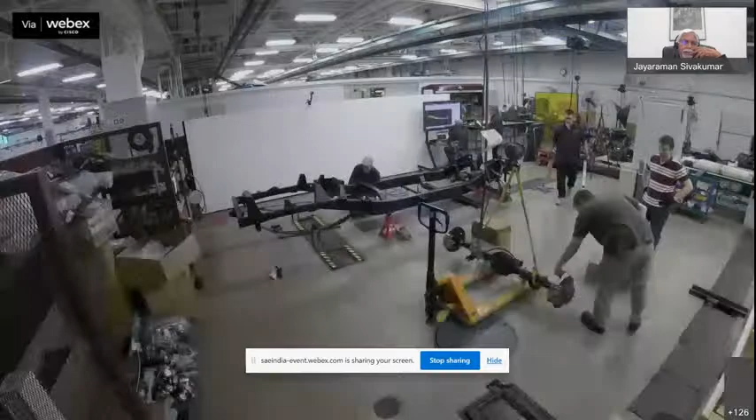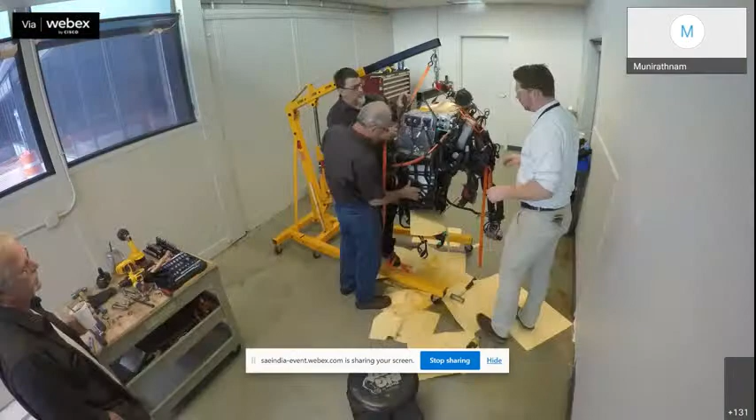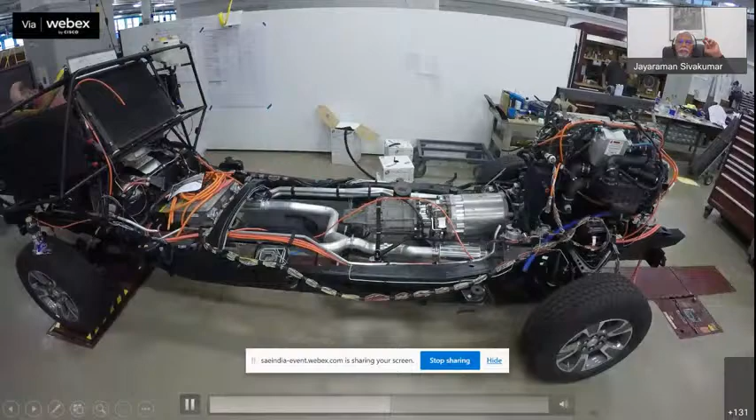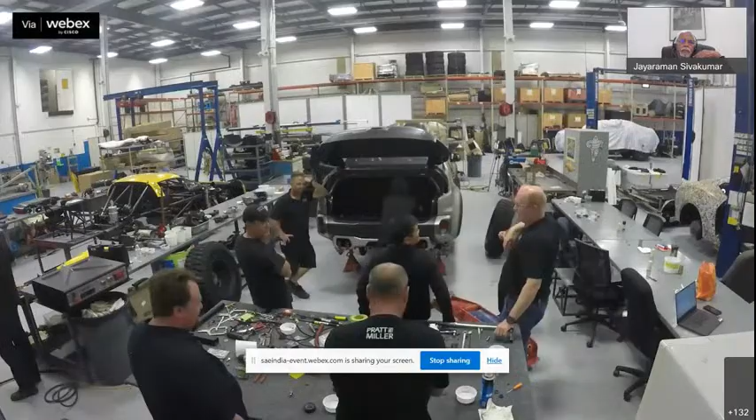Can you see my screen? Yes, sir, I can see your screen. Is it blue? Jeez, I have a problem with my laptop. I got to stop. No, I think that was basically checking. Can you hear the music? No, we are not. How do I get the music on? If audio and video, can you hear and be able to. So you can go to audio and video there, sir, on the top, just next to view on the top menu of WebEx. On the top, so file, edit, view. Okay, hold on. You can't teach an old dog new tricks. So in that WebEx, on the top, you can see audio and video. Able to see that? Now we can, where do I? Fifth tab from the left. Slightly above that, above file, edit, share, view, audio, video. In the WebEx screen, Shiva. So you can unshare, sir. Can I request you unshare your screen and go to the top. Unshare, on the top you see file, edit, share, view, audio and video on the top. I don't see that. Okay. I stopped. You can see my screen, right? I'm not sharing. So yeah, on the top side, file, edit, share, view, audio, video. You're not able to see on the top? I don't see. Okay, looks like my ignorance is exhibited a lot. So we'll stop at that point. So we'll play without the music and assume some nice drums behind in the background. Some audio is coming. Yeah, finish this.

So you were able to see our fuel cell being assembled without the music, I guess. This is a very old video clip, probably 5 years old. The only reason I brought this up, I think Venki talked about collaboration, and you saw how the whole thing was collaborated and built in probably 2 minutes on the video. I want students to look at it and work in the same fashion, seamlessly, without any issues or bickering, working together as a team. So these fuel cells, we are doing it for buses and also for military vehicles, it's being worked out. Basically they could enable stealth in army vehicles so that they cannot be detected by radar or sonar. It produces close to 2 gallons of water per hour, so in a desert it is much easier, you get water for free. The range is around 300 to 400 miles without recharging, and if left alone it can power a hospital in the middle of nowhere. So this is part of our future for taking care of energy issues, and having a zero emission policy.

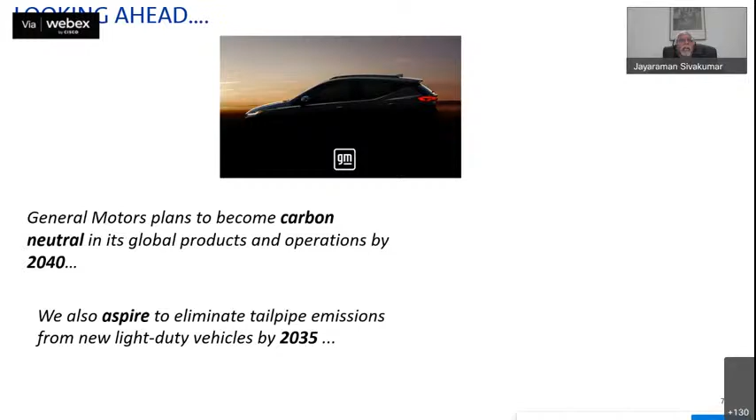Looking ahead, General Motors plans to become carbon neutral in its global products and operations by 2040. When we say carbon neutral, what we mean is the output of carbon dioxide is made neutral. You are not adding anything to the system that would mess up global warming or climate change.

We also aspire to eliminate tailpipe emissions from our light duty vehicles by 2035. And you saw our fuel cell in operation. We are doing it for Navistar, for the Class 8 heavy duty trucks, and we had some in buses in Seattle, if I remember right. There is a fleet of fuel cells running all over the US with hydrogen fuel stations. So this is all our commitment for the future, being very energy efficient.

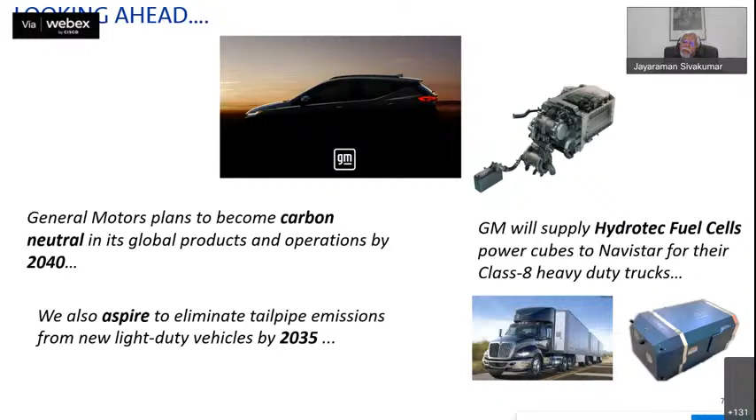So we've got many exciting electric products and concepts, and Ultium is our basic platform that we use. It's very revolutionary, a very flexible battery architecture. It will take different vehicle types, and it produces outstanding power, range, and performance.

So you could go anywhere from 6 to 24 modules. These can be placed vertically—we call that the 'toast'—or horizontally, called the 'pancake' version. Based on the number of modules, you have the type of vehicle we use, and it provides a very thrilling driving experience. It allows us to be charged, and it offers the range which we want to hit the road with confidence.

And also this Ultium architecture being at the bottom provides almost nearly 50-50 weight distribution of the vehicle, and it lowers the center of gravity, which results in a vehicle that is much sportier, more responsive, and allows for very spirited driving.

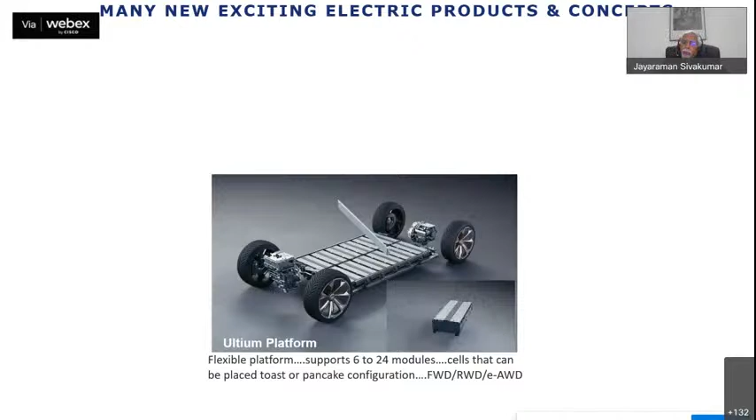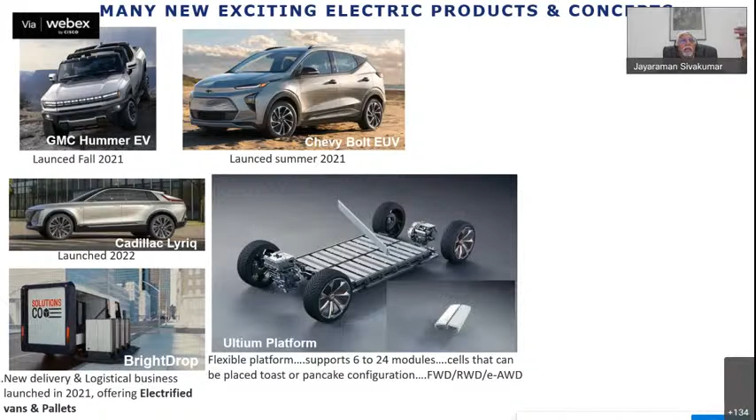And on the bottom you see BrightDrop. Basically, it's a delivery truck. It has pallets which are done electrically, no more manual stuff. It's a lot safer, and you can get your stuff in and out, and delivery is made much easier. This vehicle was launched in '21, last year, and the development time for that was less than 2 years—total development was around 1.5, I am told. There was a lot of virtual activity that went into it, and I will talk about that shortly.

And on the right side, you see Cruise Origin. It's planned for release in 2022. It's an autonomous vehicle, self-driven, all electric, and it is a shared vehicle. It's being tried in San Francisco, and they're going to try it in Dubai this summer. Once the concept is tested, it will be out on the roads pretty soon in major cities in the US.

And on top, you see the cell manufacturing facility in Lordstown, Ohio. It's a joint venture with LG. It has a capacity of 30 gigawatt hours per year. Originally, they were producing trucks in 2017, 2018, and now this is providing jobs and manufacturing a lot of batteries for our future products.

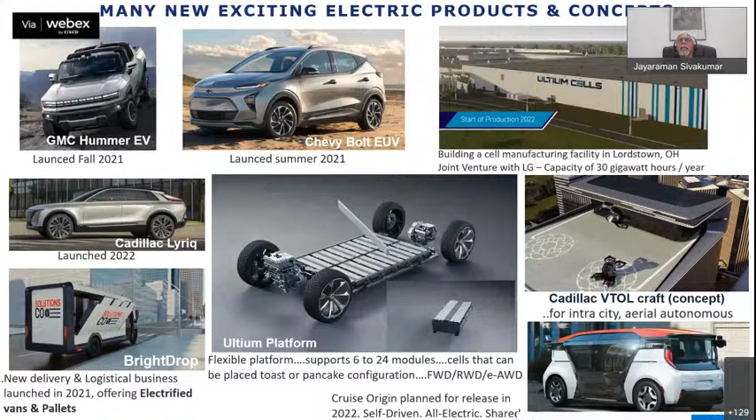And what you see in the last one is the Cadillac VTOL. It's a concept drone craft for intracity autonomous travel. Like a helipad, you come on top, get down, and it's totally self-driven. I think this will be a must for Bangalore, going from the airport. We have helicopter rides today, but very soon you'll see one of these hovering, based on how mobility folks push things forward.

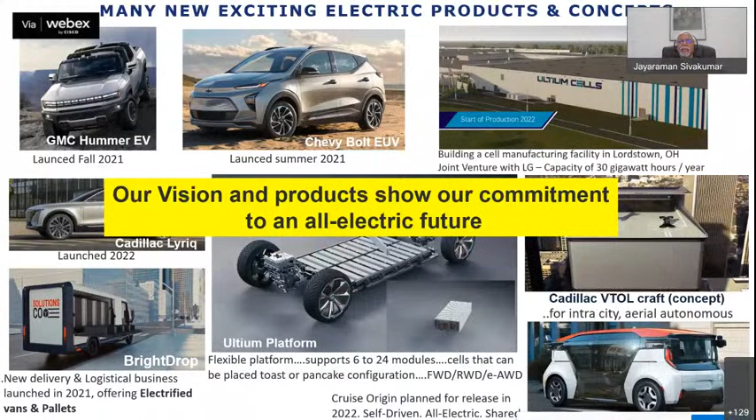So it's very clear our vision and products show our commitment to an all-electric future. You guys are part of this as students, researchers, and fellow industrial colleagues. This is where the world is headed to.

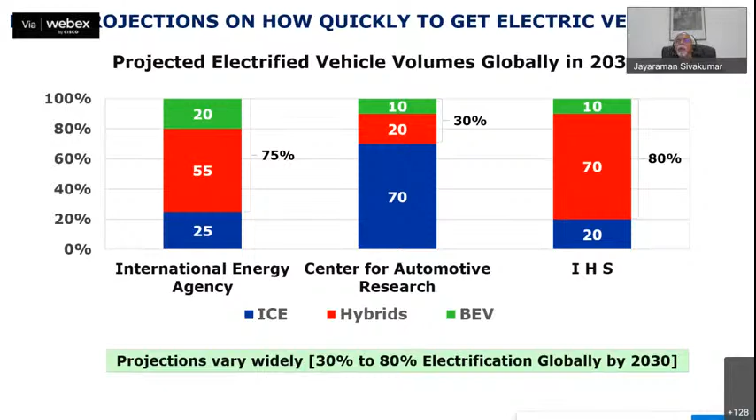If you look at this graph, I want to show projections of how quickly we get to electric vehicles. The International Energy Agency talks about 55% hybrids, 20% battery electric vehicles, whereas Center for Automotive Research claims 70% ICE and 10% BEV. IHS Markit, the S&P company, says 70% will be hybrids, 20% ICE, and 10% BEV. So there's a large variation in projections for electric vehicles by 2030, ranging from 30 to 80%. But if you poll executives, they're somewhere in the middle, averaging around 52% predicted by 2032 for new vehicles bought by customers.

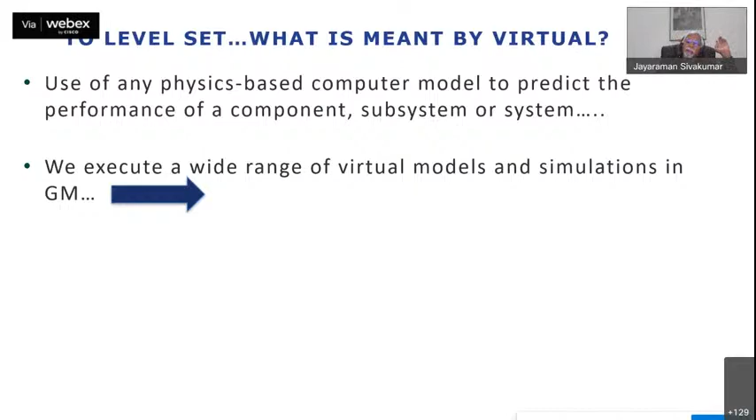Before we go, what is the rationale behind analysis? Where does analysis come into the picture to achieve this vision?

So if you have a new concept, you do the architectural level analysis first. At this point, you don't have high fidelity computers or software, you have very simple synthesis tools, and you look at the concepts. You have best practices, you use them, you have thumb rules, and you have experts' opinions. You do all that, and then you go to the CAD or get the design done.

Once you get the design done, you do rapid analysis, and the arrow you see in light or dark yellow, you go through several iterations of that. That is the best time to clean up your design virtually.

Once you are done, you come down for virtual validation using high fidelity models. This is a virtual dyno. Still, at this point, there is no test, no alpha vehicle, no beta vehicle. So you are still working on the computer and generating a virtual model.

So then you go ahead on a loop. You find something on virtual, you go back to the design, clean up the process. You iterate till you are comfortable that you meet all the requirements, and then you do one hardware validation, because we would like to see how the car drives, how the engine performs, how the system works. So you do a final hardware validation. After validation, if you have a problem, you understand it, go back to design, and go through this loop again.

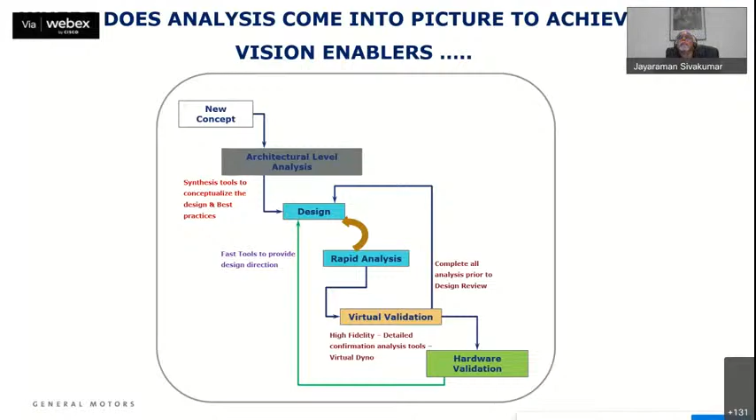So this is a structural simulation. On the left, you see stresses in a car body hitting a pothole. Hitting a pothole is very common in Michigan, the roads are not that great. Also in Bangalore, if you hit a curb, you'll know either you've screwed up your control arm or your tie bar, your alignment will be gone, your tire is gone. So all these load cases are done virtually, you don't need to try it on the roads. We make sure we cover the majority of these load cases. That is the stress pattern you see when you hit a pothole.

On the right side, you see deformation of a battery pack due to abuse jacking. Whenever you have a flat tire and want to change it, it happens at the inopportune time, so you pull your jack and put it on the specified locations you're supposed to use. But 90% of folks don't use those locations. That's why we do this abuse jacking analysis, to check if you do that, does it damage the enclosure of the battery pack and the bottom of the vehicle, does it screw up the battery pack?

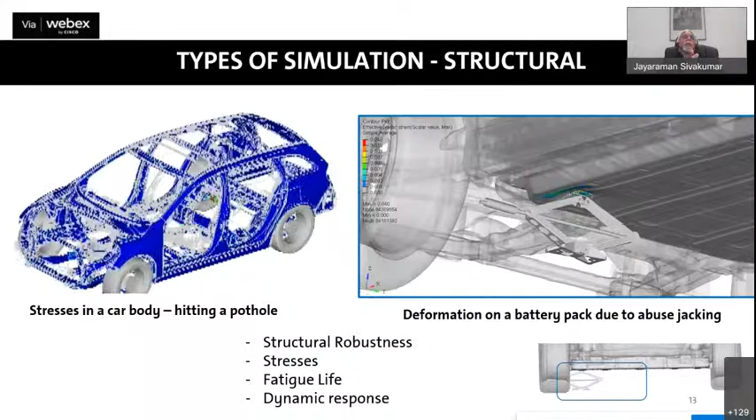A similar thing we do on ICE is on the oil pan. We also do abuse analysis there, if you run through chunks of ice in western countries in winter, do you get road load abuse and all that? So we look into all structural aspects, we look into fatigue life, dynamic response, frequencies, noise, and a good number of other things.

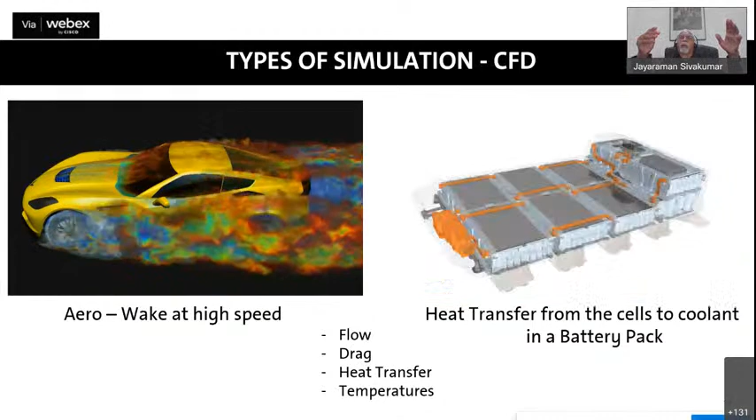On the right side, you see we run a coolant flow on the battery pack and make sure the battery pack does not heat up to the point where we have issues. I have a couple of slides later to talk about what happens when your battery packs get heated beyond what you can allow.

So through these analyses, we are able to predict flow, drag, heat transfer, temperatures, and stresses due to temperatures, and so on.

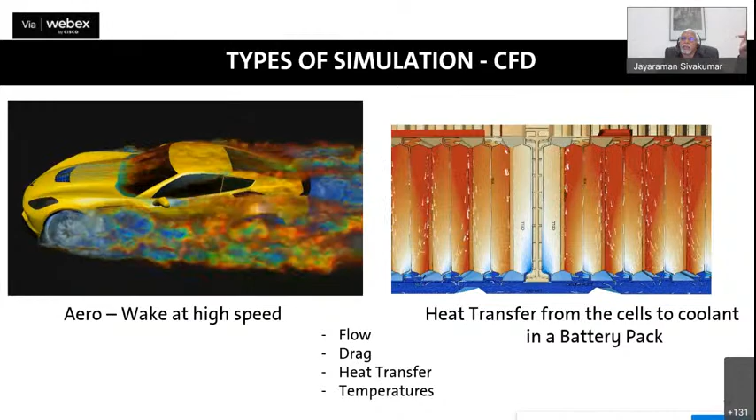GM is big on safety, and every car manufacturer is big on safety. There's a consortium where all of us work together on this. What you see here is not a test, it's actually an analysis with a nice animation. When there's a side impact and collision, you see what happens to the vehicle, and then the effect of deploying the airbag. Let me run it one more time.

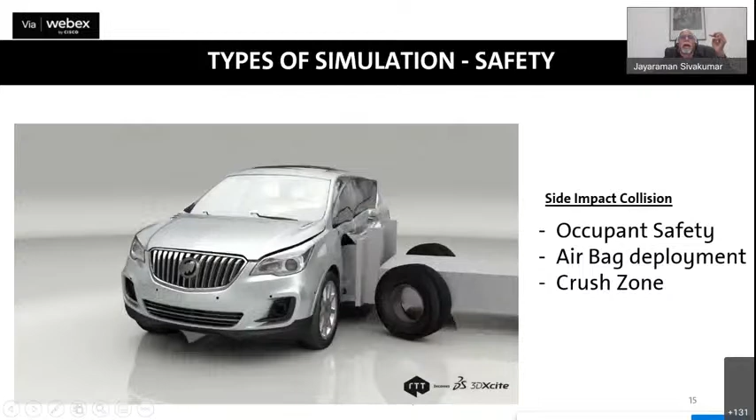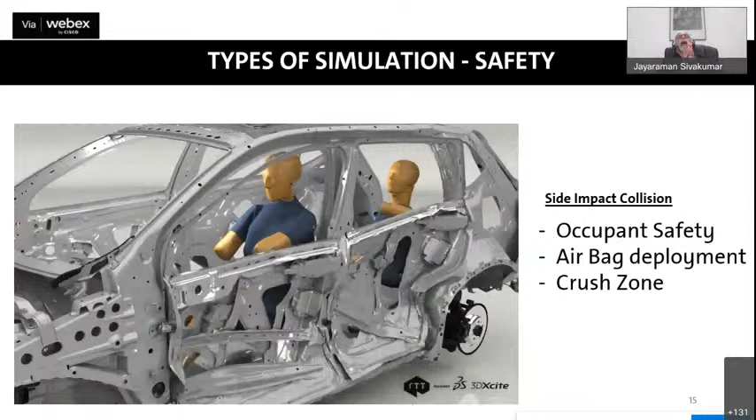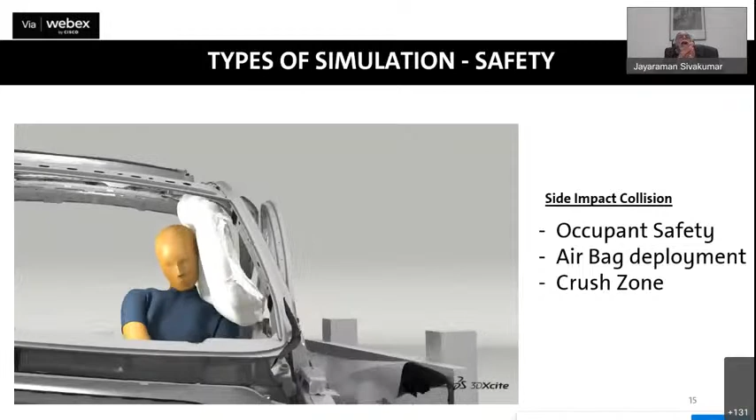These are dummies, instrumented analytically so we know the displacements, deformations, and all the important variables and parameters. We modify and even give suggestions to the airbag manufacturer on how to deploy the airbag, where to place them, and so on. We also define the crush zone and do the deployment analysis.

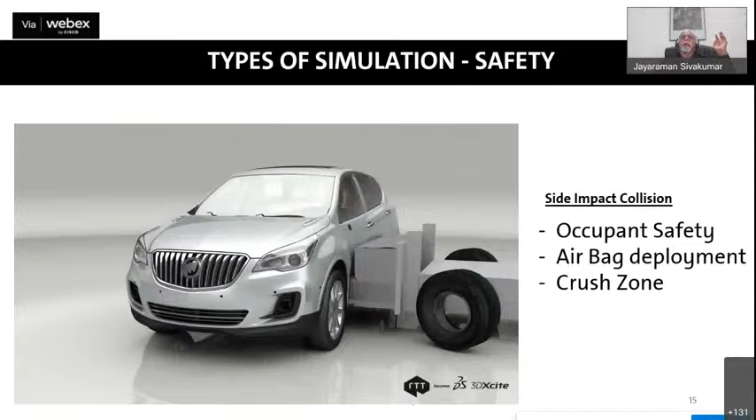The next topic is human body modeling. When two vehicles have an impact, vehicle to vehicle, on the left side you have a belted passenger, and on the right side an unbelted passenger. I want you to take a look at how the dummies move.

See, this dummy on the right is coming out of the chair, look at the neck and the amount of stress that comes out on the neck. These fractures are pretty serious and fatal in most cases. So this shows how important the use of a seat belt is.

We do all kinds of human body modeling, and GM belongs to a consortium where we share human body models. There's a 95th percentile, 5th percentile, different kinds. They model the joints, they model the muscles, and it's amazing. It's a science by itself.

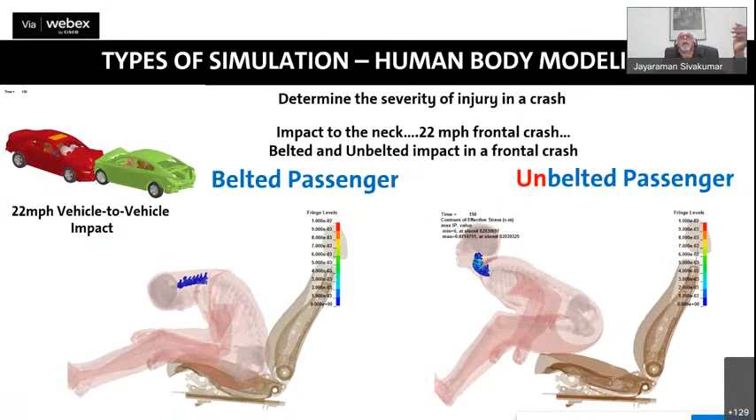So the message of this slide, and of this 20-minute conversation, is: if you are not buckling up, I want you to buckle up and tell your friends to buckle up. When you drive, do not start the car until your loved ones and friends are buckled, not just in front but in the rear also. Everyone needs to be buckled to be safe.

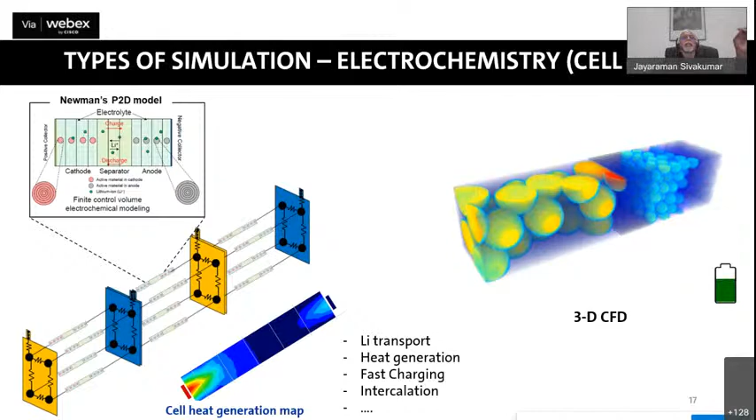We do a whole bunch of analysis, I won't go through all of them, just highlight some. We size the propulsion for the vehicle, optimize the shape of the cell, and do a lot of testing. Being new to us, a couple of our friends in Bangalore at the TCS facility test cells for us. We do lithium plating limits at the cell level, DC fast charging limits at the pack level, and fast charge analysis at the 3D CFD pack level, looking at both 1D and 3D concepts.

We also model thermal runaway propagation, a key design challenge. Once you have the enclosure, whether a pouch cell or cylindrical cell, take the pouch cell for example: these swell due to heat and put pressure on each other, like a sound wave. It swells up the enclosure, and if you don't vent it properly, it's just going to blast. Before this happens, the heat generation catches and gives fire, what we call a thermal incident, and it catches so fast that within milliseconds everything goes into fire.

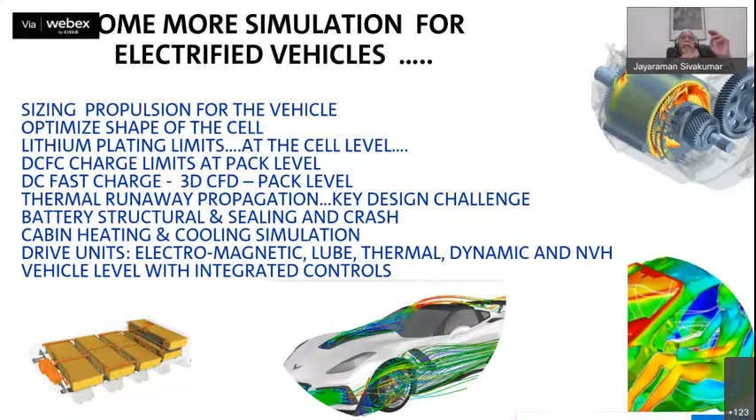And we also do vehicle level work with integrated controls, which is a big thing. So I want to show this schematic where we have system and subsystem models on the vehicle.

These are optimized models that include the drive cycles, the environment, the driver demand, the batteries and motors, all the transmission components, the cooling, the HVAC, and the cabin. Everything is modeled, and these are plant models.

We add virtual calibration and embedded controls. Instead of testing on the HIL bench, now we move to SIL, software in loop. From software in loop we go to driver in loop, then vehicle in loop. So everything you'd calibrate on the road, we can calibrate in software much before the hardware is built—that's the power of the virtual approach.

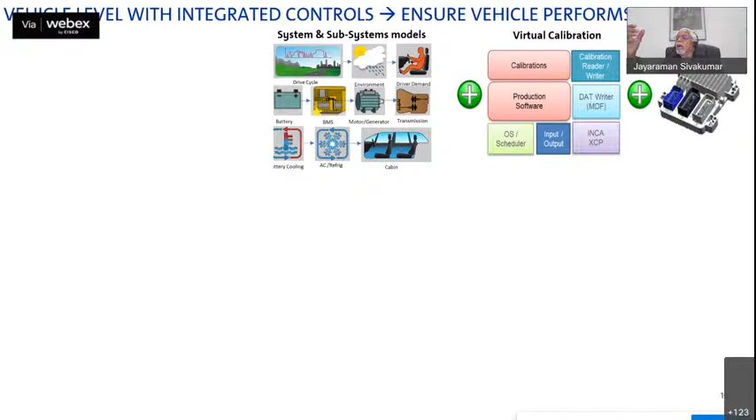This is where the controls engineers and mechanical engineers work together, with a software component to it. We're moving into software defined vehicles, with a lot of infotainment aspects, and all of this is combined together, working upfront.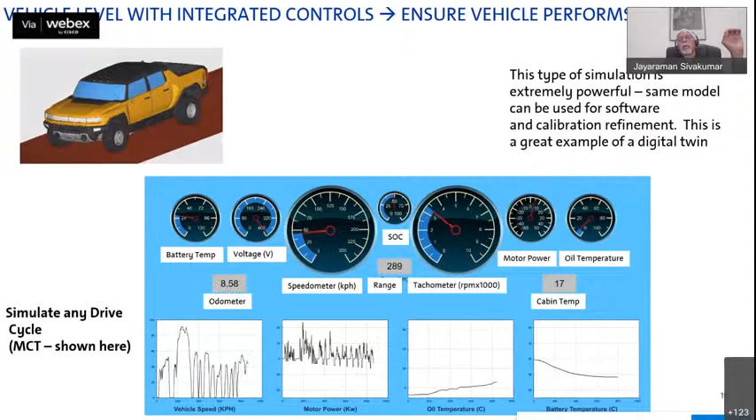So everything is done virtually, and once you're satisfied, it goes into the hardware. This is why we call it a great example of a digital twin, a virtual model.

If you look at ICE engines and electric vehicles, the simulation tools Venn diagram shows the vehicle level. Most of them use common software where we do structural crash, ride and handling, the human body, the SiL, the NVH, the 12 volt which takes care of lighting and other activities in the car. So these are pretty much common.

But in ICE, we have combustion, after-treatment, and fuel injection—these are specialized software. On the EV side we have the same thing: electrochemistry, electromagnetics, high voltage. There's a huge group of power electronics people who are the core of the analysis making this happen.

So all these guys have the right software. We work with suppliers; we cannot do it alone. This is done with suppliers and software partners, and it's an evolving industry on the virtual side. These are more unique, and each OEM has their own style of doing it. We are committed to doing 100% virtual work and only testing in the final version.

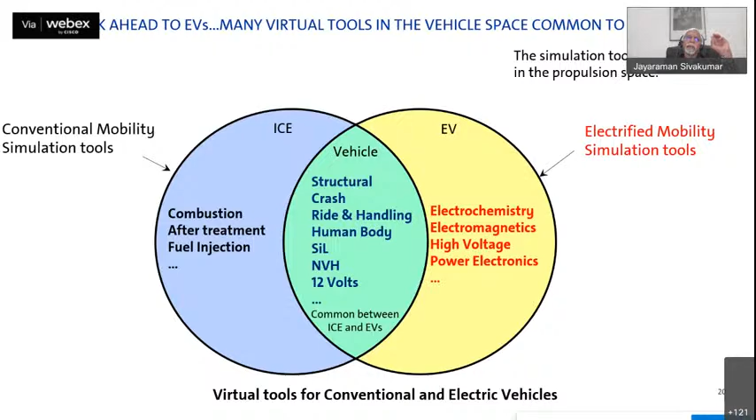So when I say we have challenges, what we have decided is we are going to cut our development time into half, and we are also going to reduce the hardware completely, to the point wherein we will not spend any for protos. That gives us the challenge to do all this virtually, and we have a lot of challenges.

Early on we have the VTS, the technical specifications. We have the range defined, we have the 0 to 60 defined, we have the top speed defined, and then we synthesize using models. We know what battery capacity you need, and once you decide that, you go to the motor design, how much torque it has to transmit, then look at gear ratios, and work on power electronics. All this is done on vehicle level system models, and I don't even claim to know how these folks do it. It's phenomenal that they put all this together upfront.

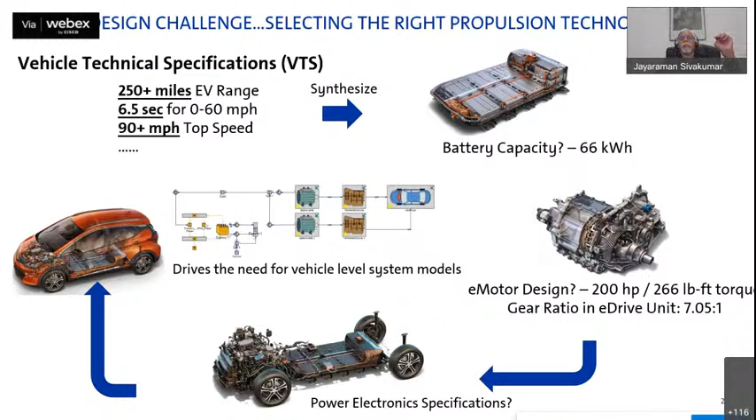So what are the challenges involved? The battery thermal is a key challenge. What happens is you have a very sweet spot wherein your battery operates efficiently, the lithium ion batteries, and you see in the graph it goes from 20 to 35 degrees. Below that, the electrochemistry is sluggish, and above 35, there is degradation of the battery. So you need to monitor the thermal gradient on a battery pack.

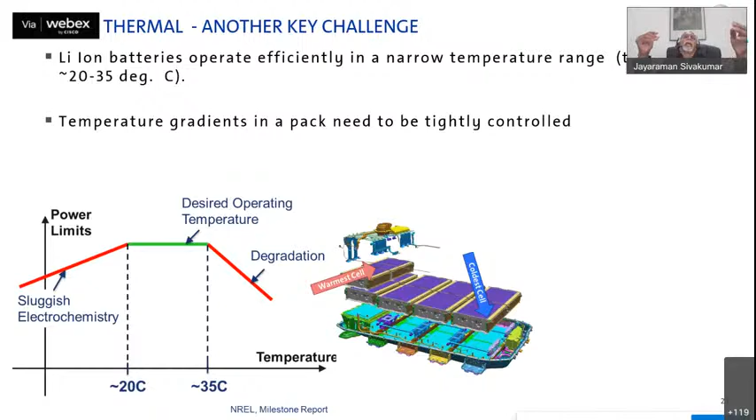So you have a great cooling system which is modeled. You have a great sealing system, and you ensure a good venting process, a nice seal, and ensure that the temperature increase is uniform, so that you don't have a high gradient. If you don't, what happens is you have a thermal runaway, basically from one cell to the other cell, and one module to the other, and fire catches up, and you know what happens.

So there are international standards that specify, if the thermal event happens, how quickly the system alerts you, and you need to be out of the vehicle in the eventuality that this happens. That is one of the requirements which is being worked out across all OEMs.

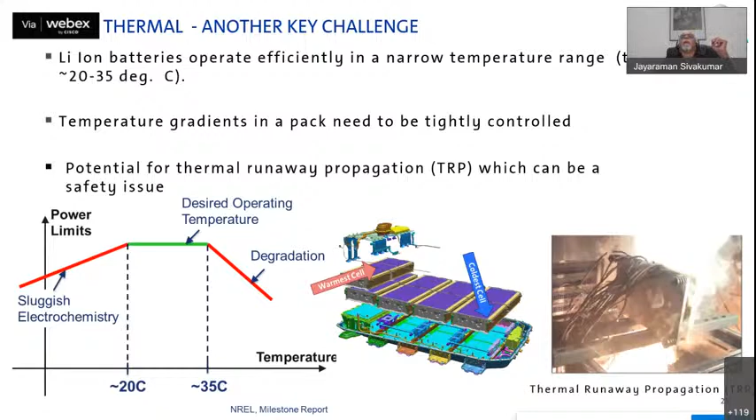And I talked about HVAC has a significant impact. In cold countries, the first thing we do in the morning is get into the car and turn the heater on, and even heated seats so that you don't freeze. The minute you turn them on, if you continue to drive with the heated system to your work or wherever, right there you lose 50% of your range of your electric vehicle.

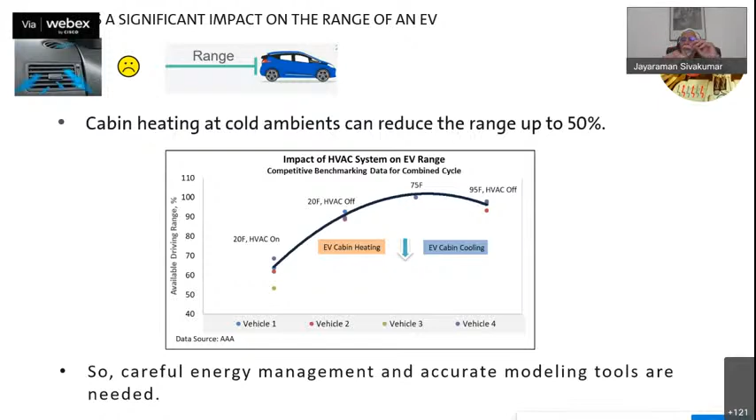So if you go at 20 degrees with the HVAC off, you are still somewhere around 80 to 90%. Then the optimum shows around 75. And then you put your cooling on, and once again, it's parabolic, it comes down and reduces efficiency. So the driving range gets reduced. We have a lot of virtual models, 1D models tied to 3D CFD models. They talk back and forth, and we adjust in such a way that the cabin is heated and cooled in a very efficient manner, purely for range.

And we talked about, if you want to fill gas, you just stop by a station and pump gas, and 15 gallons of fuel is delivered in approximately 3 minutes, whereas it takes a lot of time to charge your vehicle. They are saying that we are 20 times lower in terms of charging than conventional gasoline. So this is a big issue, and this needs to be addressed.

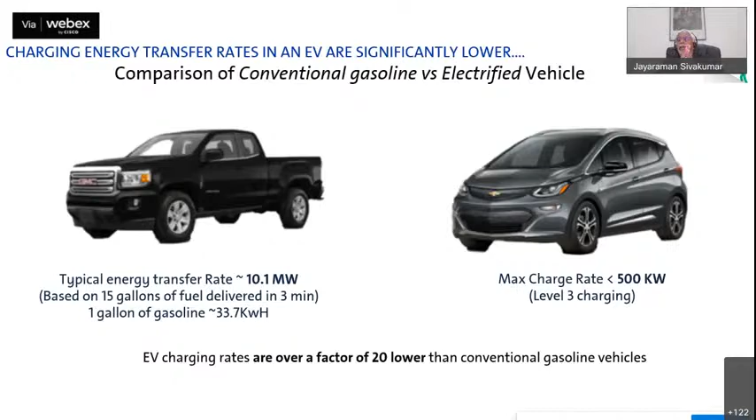So these are challenges. The other thing is, if you want to charge the battery so that you are able to move from one spot to the other, or even at home you want to charge something, you have to charge in such a way that if you charge too fast, the lithium ions accumulate on the surface of the anode, and we call that lithium plating.

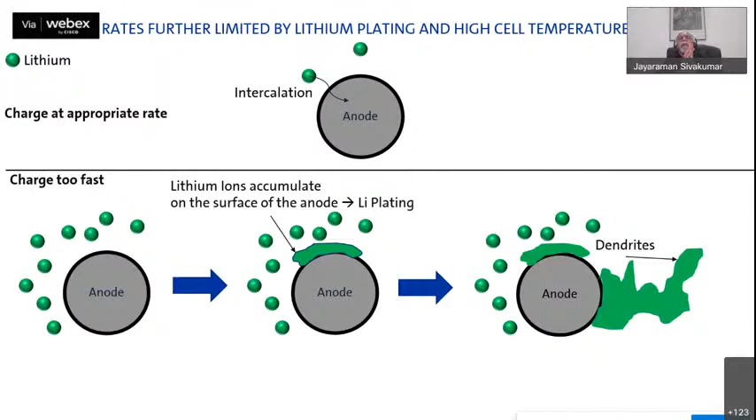And then the lithium plating forms dendrites, and this dendrite formation is a precursor for thermal runaway. So also, even if you don't form the dendrites, the high charging rates cause overheating, and then the overheating causes fire. So this is a very important aspect we work on.

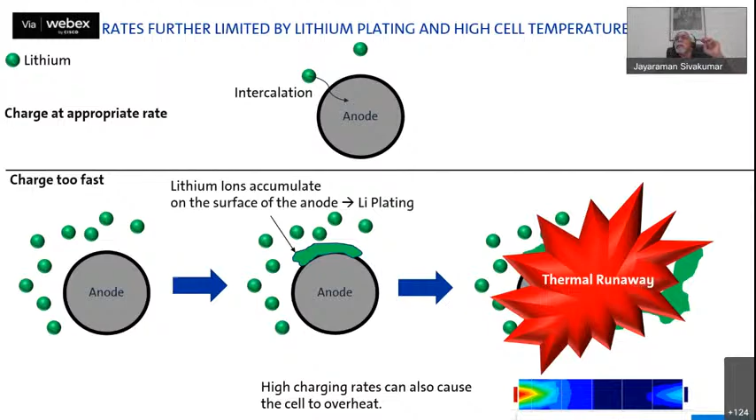So we talked about all these challenges. We listed a few. Given these challenges, how can virtual help?

So the first point is, we need vehicle level models up early in the design process. You cannot figure it out in the end. That's why I showed you a vehicle model in the architectural stage. You ensure that the VTS are met, and then you bring in the controls and calibration.

So the calibration engineer's job is not gone. He forms a part of the virtual team, and it makes his life simpler, and he can virtually calibrate what he does on the proving grounds or on the road. So everything is done virtually.

Then we have the option afterwards to fine tune and optimize at the component level, and then you have a fine system.

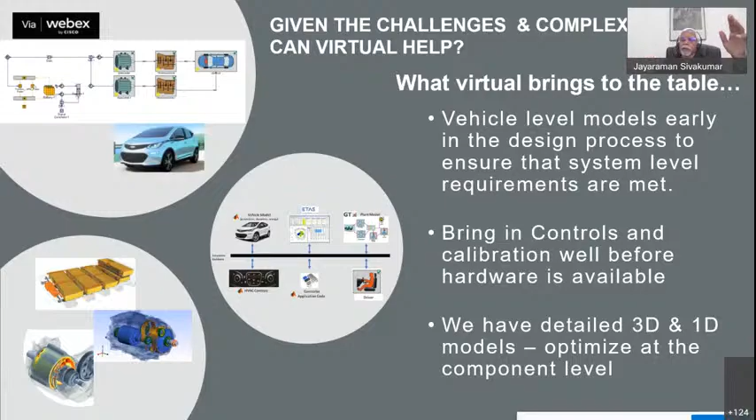So there are unknown factors while mobility is there. We looked at 2030, anywhere from 30 to 80% projection of BEV vehicles. So it's going to show up, but we do not know how soon it's going to show up. So what are the factors that accelerate or slow down the adoption of EVs?

So the battery cost is a very important factor. We need to bring the cost of the battery down to make it more affordable. That is why the government is giving us enough rebates.

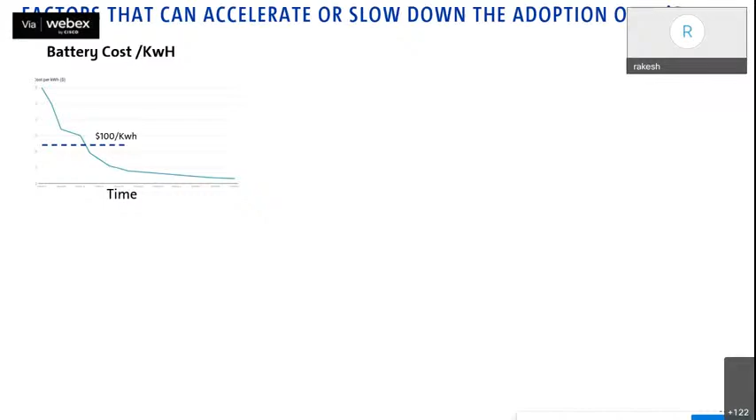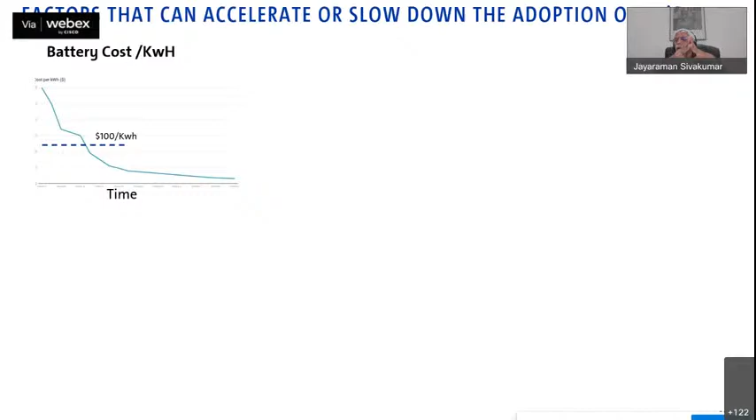Thank you. So one of the issues is battery cost, and that is where the battery manufacturers are working very hard to bring the cost down so that it's easily affordable.

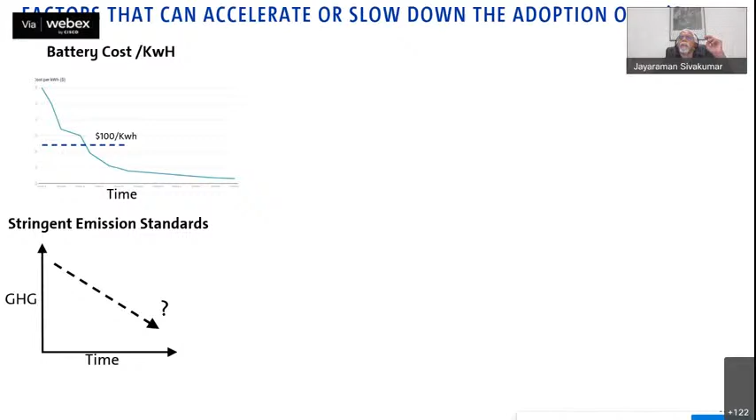Then you have stringent emissions. If future emissions on the ICE vehicles become very stringent, it makes the business case for EVs much stronger, and EVs will become reality closer than what we predict.

Also, the customers have range anxiety, and they have concerns about charging times, and also about figuring out where to charge. So there are a lot of apps coming in. I remember several years ago at GMTCI, we had a lot of folks innovate apps to tell the public where these charging systems are, how long it takes to get there, and apps to tell you how soon you can get there, what is the waiting line.

So the possibilities are endless for people to help with this anxiety, the range, and the infrastructure, and people are developing solutions so that people are comfortable driving these vehicles.

My wife has anxiety even on ICE engines. I drive to the last drop of gas, and I have stopped in the middle of the road in the middle of the night with snow, and I have been in trouble many times because I know our vehicles can drive a lot more range than what people think, and I have paid the penalty.

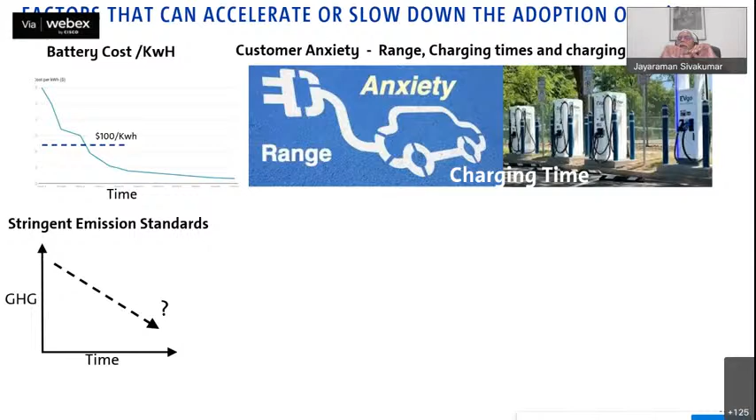And there are political factors. There are countries which ban ICE outright, and I think Norway was the first one to do it in 2025, and I think France or Germany, I can't remember, said no more ICE engines by 2030. So once it is done, it's kind of like a pandemic, it goes all over the world. US will adapt, China will adapt, rest of the world will adapt, and then it will be all EVs.

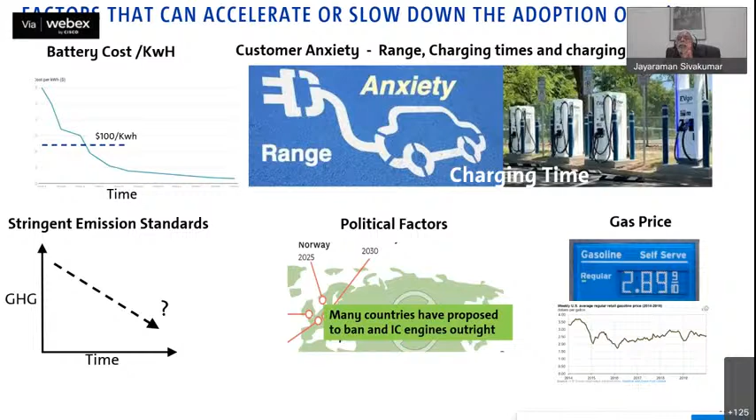So then the gas price, if it goes down, then EVs will take a long time. But if the gas price goes up, people will go for EVs, and the adoption is quick. So the question is not if, but when we will get there. ICE and EVs will coexist for some time to come, and we need to know when we are getting there.

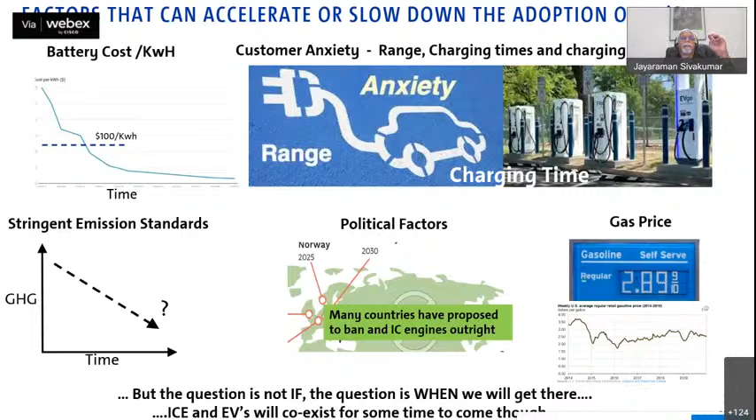So in summary, I'll tell you that we are committed to an all-electric future, and you see every day OEMs declaring this. Volkswagen had declared before. Toyota recently declared that they are moving away, since they were big on hybrids.

They're pushing electric vehicles now, so you will see a lot more electric vehicles on the market, and virtual will play a key role in the future of electrification, especially at GM. We just talked about the anxieties, and basically we will get there, but the question is when. It's a student body out here, and I want you guys to try as much as possible on virtual, remove all your kinks, and then learn, so that when you build your REEV vehicle, you have very less problems and issues. The more you work virtual, the more you are able to handle. You have all your volunteers helping you out on various aspects, and virtual is one of them.

Any help needed, please let us know. I thank you all for listening to the few slides I had, and I thank you for the opportunity to talk to you. Anytime I talk with students, I get energized. Unfortunately, I am not on campus. Whenever I'm on campus, I feel a few years younger, and I should visit Presidency and Amrita and the rest of the places.

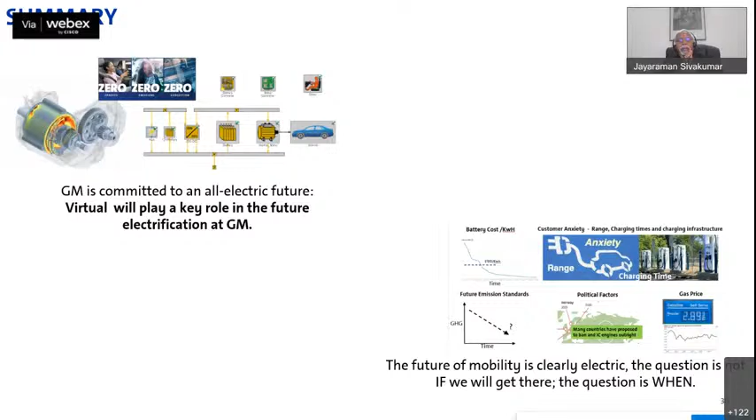I want to thank Radu, my colleague - he is my evil twin in many ways. He is the guy who does things well, and I'm the evil guy. All the slides which I presented were basically his. He just gave them to me - he's vacationing somewhere in Michigan and told me to use these slides. I was fortunate to use most of his slides this time. So I just want to thank Radu for giving his slides to be shared with the student community and with the faculty out there. Thanks a lot.